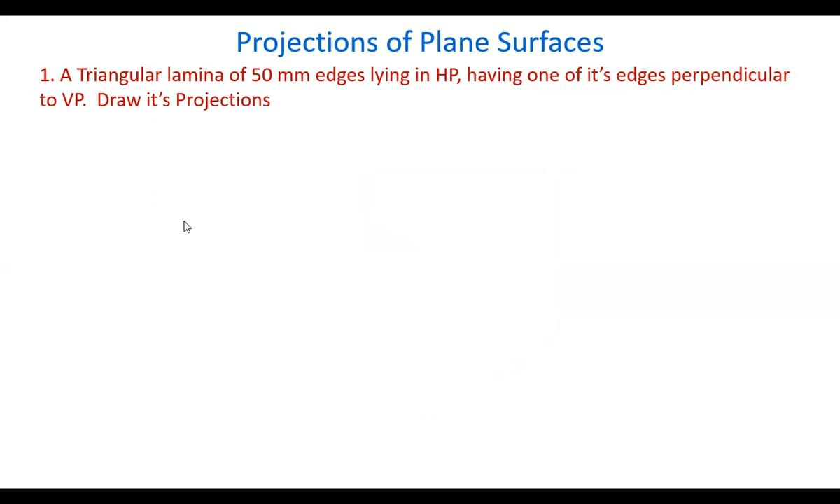Now, coming to the projections, take the reference line and draw the top view first. Having one edge perpendicular to VP, an equilateral triangle is drawn. Show the dimension 50 mm. And now mark the corners A, B, C. The corners are named here. And draw projectors from all the points. Okay. So take the extreme projectors, and now highlight this from here to here.

Because it is lying in HP, the front view is seen on the reference line. So mark the corresponding points in the front view: A dash, B dash, C dash. Here C is put in brackets while A and B are open. Why is it kept in brackets? When you are looking at it from the front view, in this direction, A is nearer to the observer and C is away from the observer.

Okay. The points which are visible to the observer are written openly, and the points on the other side of the observer, which are actually invisible, are put in brackets. So this is the common notation we have to follow. So these are the projections of the plane surface, the triangular plane.

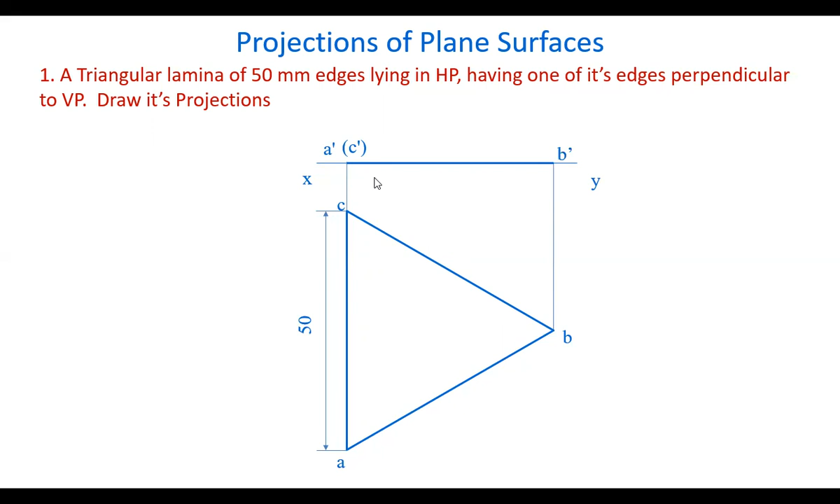Okay. Next, let's take another triangular lamina, 50 mm edges, parallel to VP. That means the plane is like this. In the front view, we see the true length, the actual shape of the object. Having one of its edges perpendicular to HP. One edge is taken perpendicular to the horizontal plane. So let's draw the projections. Take the reference line and draw the front view; because it is parallel to VP, we see its true shape in the front view. So draw the triangle in the front view and show the dimensioning.

Okay. Name the corners here like A, B, C. It's up to you whether you start A here and B here. But generally we follow one notation. Suppose I have started here A, B, C in the anti-clockwise direction. If you start here with A dash and want to follow clockwise, it's up to you. So A, B, C, that will be the naming. So name A, B, C here and draw projectors from all the points.

Because the plane is parallel to VP, we have taken some distance in front of VP. The distance is not mentioned, so we can take some convenient distance and draw the extreme points of the extreme projectors. Join a line here, and that is the top view. So mark the corresponding points in the top view. A dash, B dash, C dash in the front view, so here A like this, and the top view points are marked A, B, C, simple points.

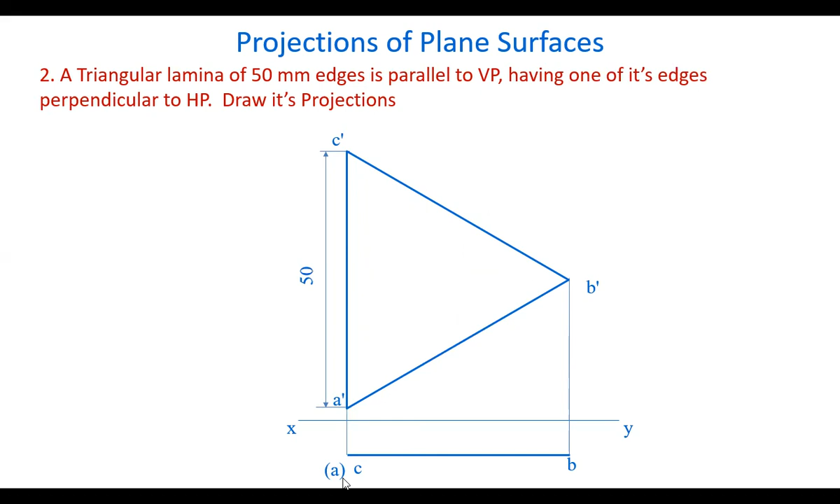Coming to this, when you are looking from the top, the points C and B are nearer to the observer and are visible to the observer. So they are open, and A is away from the observer. When you are looking from the top here like this, A is away from the observer, so A is kept in brackets. That is the notation.

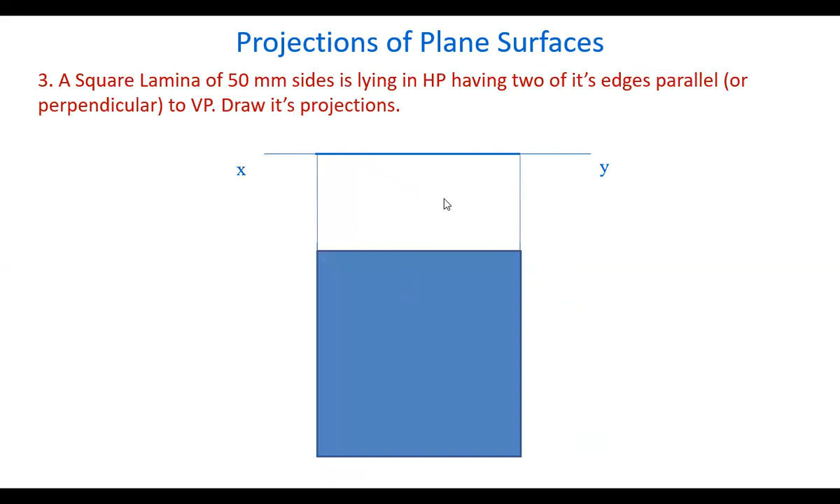Now, let's take another plane. A square lamina, a four-sided lamina, plane surface, with 50 mm sides, lying in HP like this, having two of its edges parallel or two edges perpendicular, both are same. These two are parallel to VP or these two are perpendicular to VP. Draw its projections. So this is the plane surface. Now let us draw the projections. Because its true shape is visible in the top view, let's start in the top view.

Draw the square here by taking two edges parallel to the reference line or two edges perpendicular to the reference line. So the square is drawn. Now show the dimensioning here and draw projectors from all the points. Mark these points A, B, C, D. Draw projectors and highlight this from here to here, end to end.

Mark the corresponding front view points A dash, B dash, C dash, D dash. C and D are kept in brackets because they are away from the observer. The observer is looking from this side, away from the observer. So C, D are in brackets.

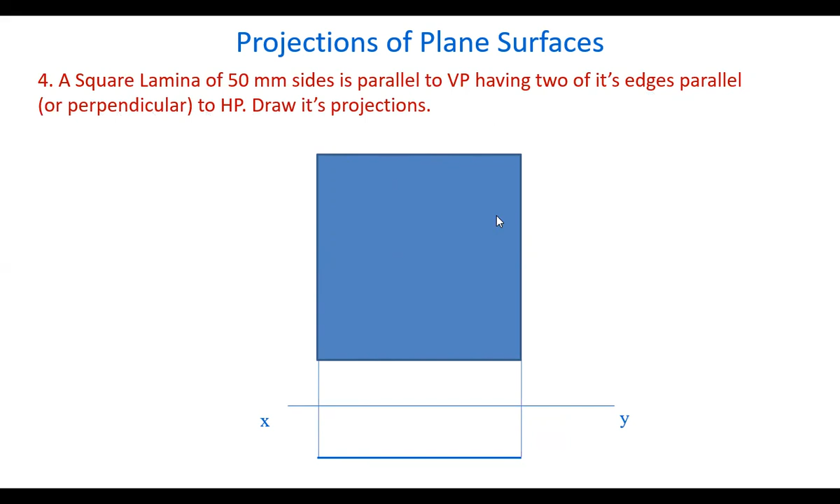Now, let's take another one. A square lamina of 50 mm sides is parallel to VP, parallel to the vertical plane, and having two edges parallel or perpendicular to HP. These two are parallel to HP or these two are perpendicular to the horizontal plane, reference line. So this is the plane surface. Let's draw its projections. Take the reference line, and the front view is drawn because the true shape is visible in the front view. Mark the points here, A dash, B dash, C dash, D dash, and show the dimensioning.

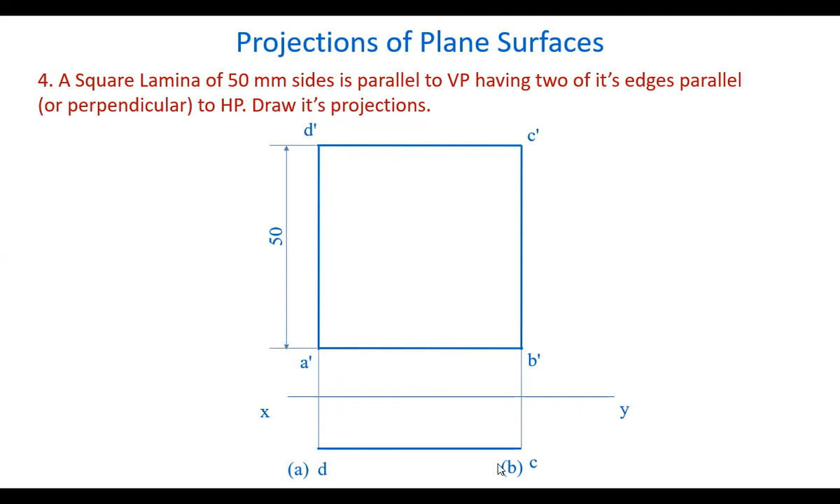Draw projectors from the points here, and because the plane is parallel to the VP, take it at a distance from VP. Now, this is the top view, a straight line. Mark the points here, A, B, C, D. When you are looking from the top, A and B are away from the observer, so they are kept in brackets. These are the projections of the square lamina.

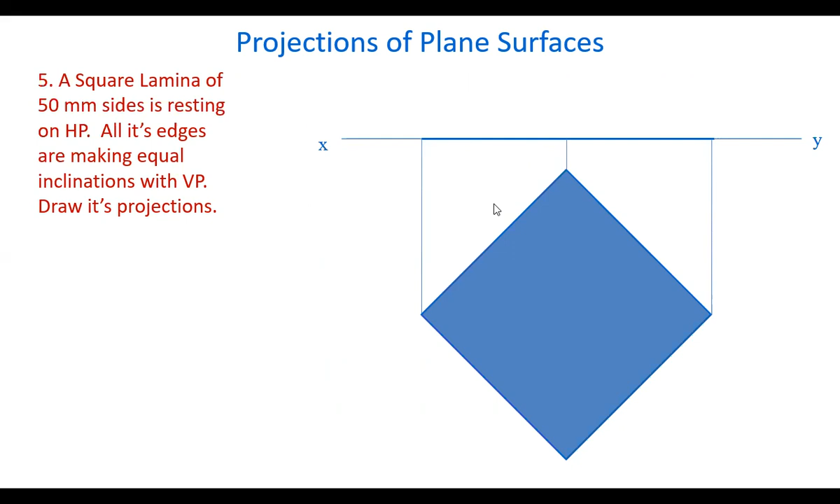Next, a square lamina of 50 mm sides is resting on HP like this. It is on HP, that's why the front view is on the reference line. All edges are making equal inclinations with VP. That means each edge is making a 45 degree angle with the vertical plane. So this is the position. Let's draw its projections. Take the reference line XY and draw the top view by taking one edge at 45 degrees. Automatically, all other edges will be at 45 degrees.

So, show the dimensioning. Mark the corners A, B, C, D, and draw projectors from all the points to get the front view. From one end to the other, you can highlight it, because it is a line in the front view. Mark corresponding points in the front view: A dash, B dash, C dash, D dash. Only D is away from the observer looking from this side, so D is kept in brackets. So these are the projections of the square lamina.

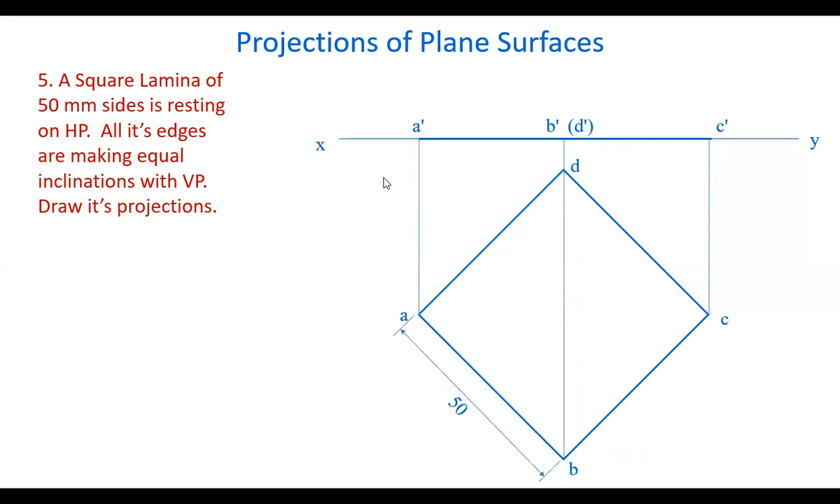Next, let us see some more plane surfaces in the next one. Hope you had understood this very well.